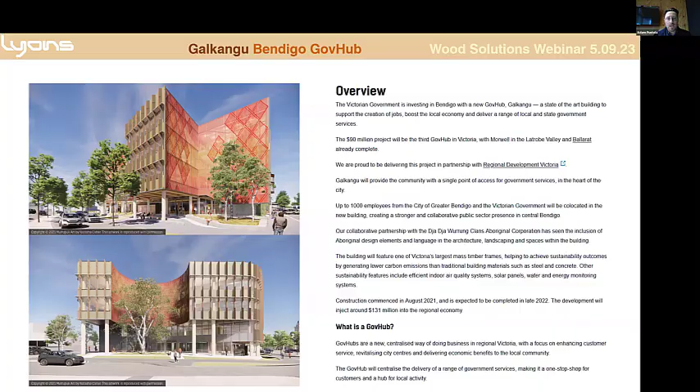The other really key part and driver of the project was our engagement at all stages with Dja Dja Wurrung, who are the traditional owners of the lands around Bendigo. Members of their community had a really important impact on all phases of the project, on the briefing, on the procurement of the project, as well as more directly contributing to the design of some elements such as artworks that are embedded in the project. They'll have an ongoing role in being part of this project.

The project is located in the very heart of Bendigo. For those who are familiar with Bendigo, or maybe not, Bendigo was a metropolis at the time of the gold rush in the 19th century.

It was built in the model of a very classical European city, and the site we're on is Lyttleton Terrace. It's a curved European-style boulevard, and our project actually occupies a whole city block, which was previously occupied by a number of different buildings from different eras. The project consolidated all of these separate titles and blocks into one unified GovHub site right here in the centre of town.

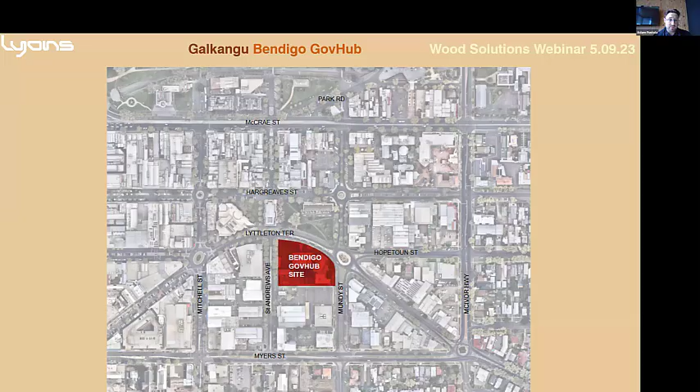So we had this really great location in the city within to make this important public project, but we wanted to make some very direct connections between our project and the city around us. These diagrams show some of the ways in which we did that.

First, we wanted to fill out the whole site, similar to how other parts of Bendigo are built right to the street edge, but that then set us the challenge of building to a curved street frontage, and you'll see how we dealt with that further on in the presentation.

We wanted to draw in some of the elements of the public spaces, such as the park and the forecourt, into our project to make a welcoming public plaza.

We also wanted to use this idea of moulding or pressing in some elements of the surrounding buildings, such as the library, the town hall, and the old Haymarket, pressing them into our building to make these small cutouts, to make it look as if this building's maybe been here longer than it actually is as a contemporary building.

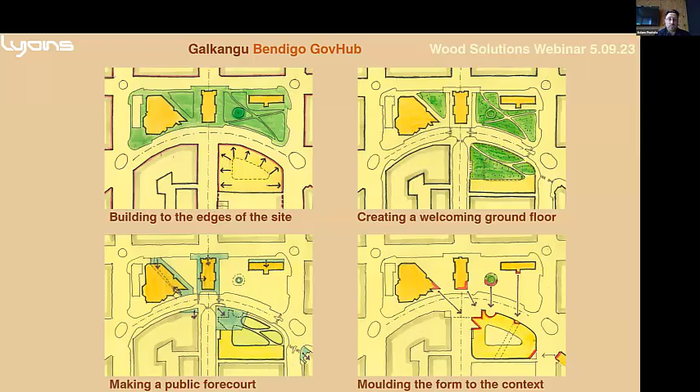And finally, as part of the overview, the building is a very large building for up to 1,000 staff.

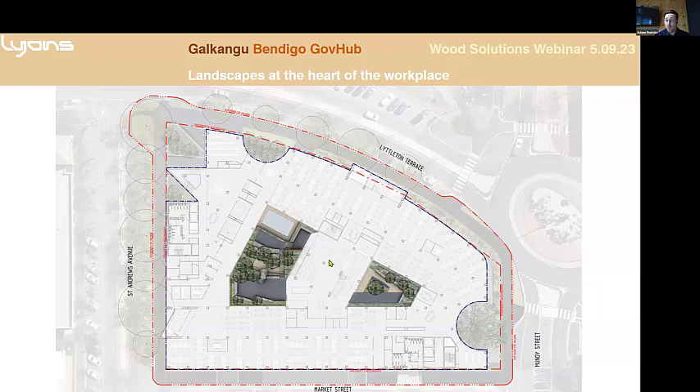It has 2 courtyards in the heart of it, shown here in this plan. In the middle, there is a central staff hub space that all staff have access to for social gatherings, lunches, teas and coffees. That's this space here. Adjacent to the staff hub are these two great landscape courtyards which terrace through the building and bring light and views deep into the heart of the project.

There are parts of the building which are more publicly accessible, such as this large meeting room and this stair, whereas the rest of this workplace is entirely for staff to move through, especially using the staff hub and the two courtyards.

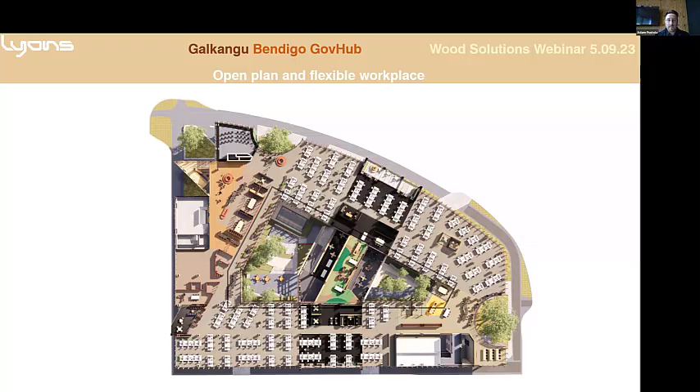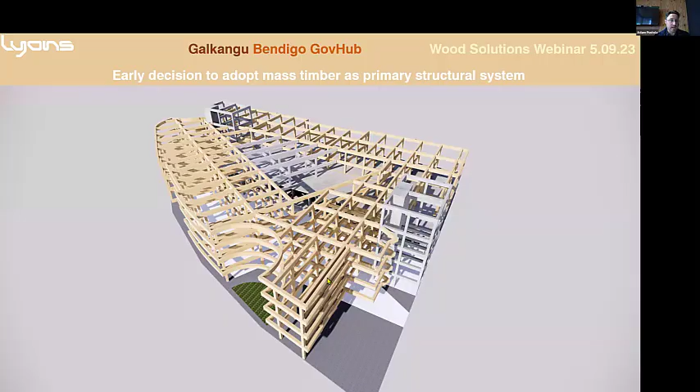One of the key decisions in the project, looking back, was the very early decision by Development Victoria to instruct us to adopt a timber structure, which set in train all of the design and engineering and collaboration, which led to the successful outcome.

It forced us to ensure that we were documenting everything in 3D. For those familiar with timber construction, what you see is what you get. You are going to be seeing every conduit, cable, light fixture, other fixings, and we had to make sure our documentation reflected as much of this as possible, so that we could be comfortable with the design outcome, as well as be able to present to our clients what the look and feel of the project will be like.

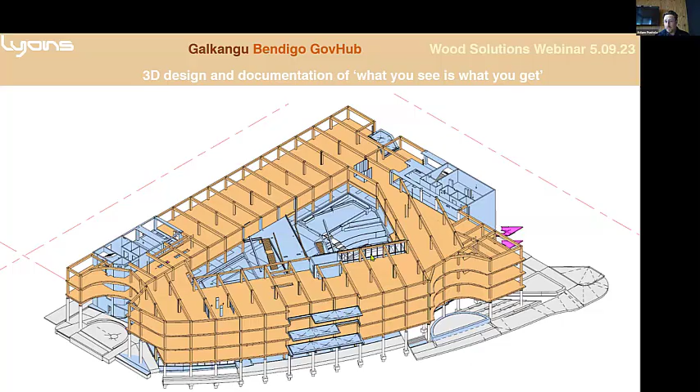These are some of our views from our documentation, which we undertook in Revit, which also shows that the project was actually a hybrid mass timber and concrete structure. There is a concrete structure on the ground floor. There are 3 concrete cores, as well as a car park.

It's 2 levels of an inclined car park that's on the back half of the site. So the project is about 2/3 mass timber in terms of its structure and 1/3 concrete, which is probably a trend which will continue into the future as mass timber comes into the industry.

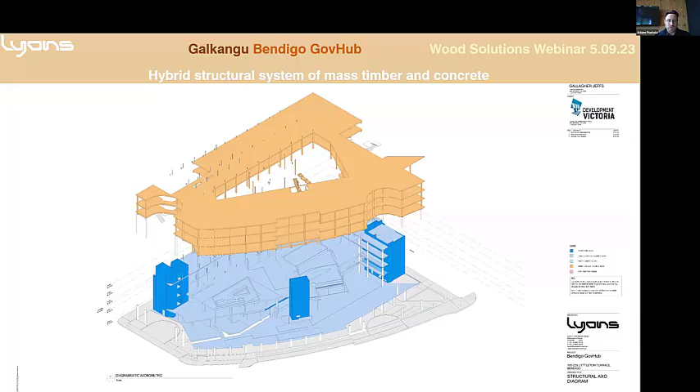Again, we also had to have very clear documentation of our ceiling plans, of our floor plans, even our below underfloor air distribution floor plans, to show the extent of all of the timber framing, all of the CLT, as well as, importantly for us, to document the visual requirements for the connections between the timber.

As you've seen from the plans and from the renders, we did create those complex cutouts to bring light and views into the project and to make those very direct connections between the town hall and the civic gardens. But what that meant is we were forcing the timber to adopt geometries that are not typical of the system, such as these curved and angled geometries.

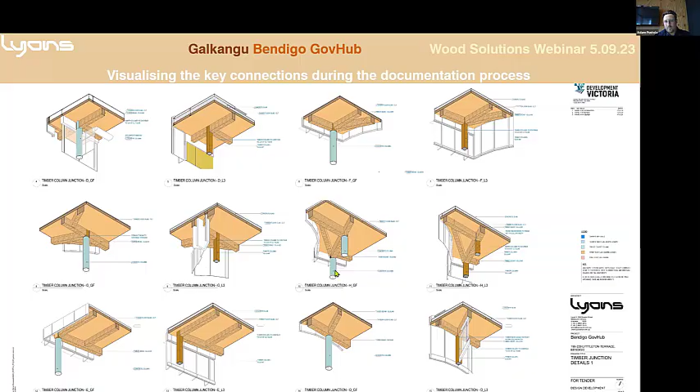So we created these drawings here, a few pages of them showing how we think these joints will come together. And then we worked very closely with ASH and with Fairbrother to develop these in much greater detail.

The other fantastic thing about using timber is the precision of it, which I'm sure Michael and Danny will speak to. But it is quite incredible how these materials come together with 1 or 2 or 3 millimeter tolerances, but that then creates its own challenges in terms of interfacing with concrete or steel, which, as we all know, has different tolerances and deflections as well.

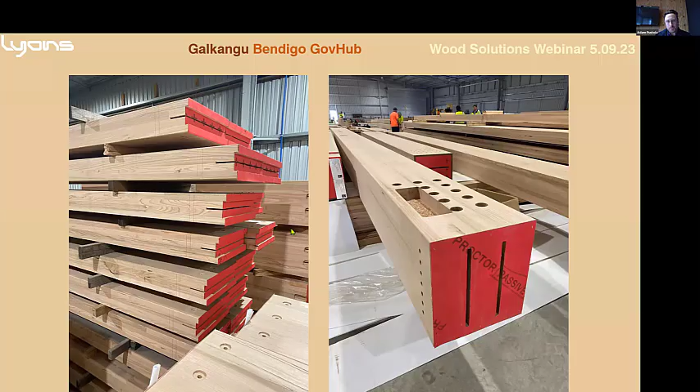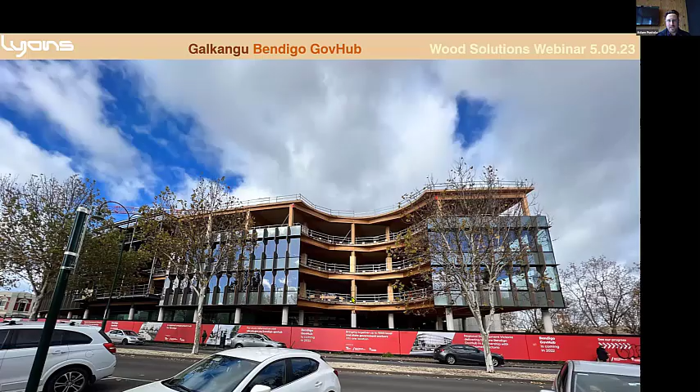These next couple of images show how some of that curved geometry was created in the project through faceting the beams here, faceting these mass timber beams, as well as faceting the edges of the CLT, and then the facade which clipped onto that provided the next layer of detail, also faceting to make those cutout shapes, but also afford these great views looking into and through the project and embracing this existing tree as well.

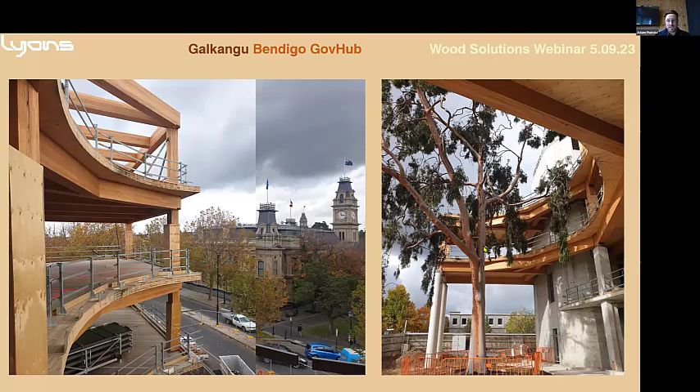In some areas of the project, the connections were quite challenging, and one of our key lessons learned is reflecting on the degree to which fire engineering needs to be used to work for all the different connection types. There's almost never enough engineering you can do on a project. There are obviously always limits, but we think it's a key consideration when you push the material in terms of geometry and where connections are exposed, that there was very close collaboration with the engineering and building teams.

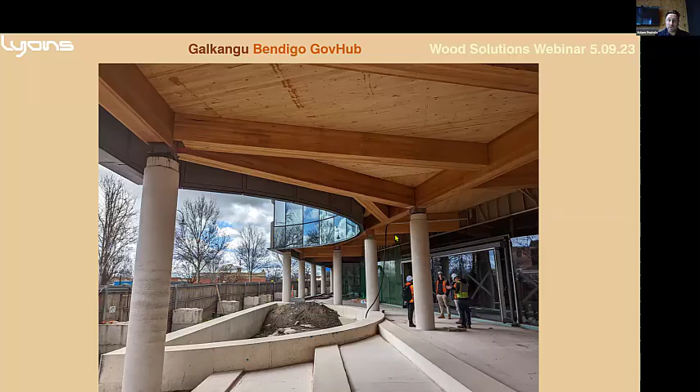And this is a view on the forecourt of the project. These next few images show more of the middle of the construction process. Here's our design team walking through the project, showing the timber just after it's been propped up. This is the CLT floor, which isn't exposed, but we do see the underside of it.

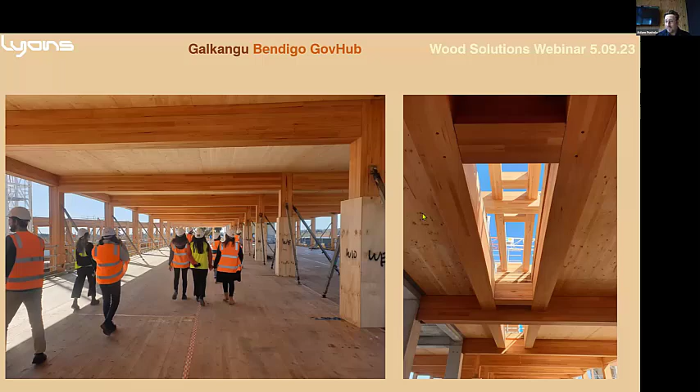One interesting observation a colleague made was looking at this element here. They asked if it was a void. It's actually a riser—we reckon it's the best framed, most beautiful mechanical duct riser going around. That was in part a consequence of wanting to use timber in a consistent fashion, minimizing where you introduce other materials like steel or concrete, minimizing different connections, and using timber as much as possible, even in moments such as this, to make these timber-framed riser ducts.

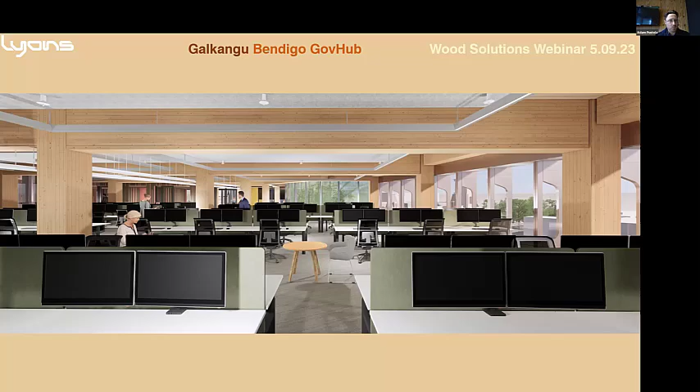The outcome of all this is a workplace that is very contemporary in its nature, biophilic in the sense that there's a lot of exposed timber with the beams and columns, and about 50% of the CLT ceilings. There's a lot of natural light coming in through the curtain walls on all four sides of the building. We were very confident going from the design views at 50% DD to what's being delivered by Fairbrother at the end of the project, which is really what we were expecting.

Another key negotiation early in the design phase was around different combinations of timber beam sizes, and whether we would use just primary beams or also secondary beams, and whether the services would be on the ceiling or in the floor. Obviously these negotiations are custom to every project's needs, but the key driver for us here was to maximize the exposure of the timber in the workplace levels.

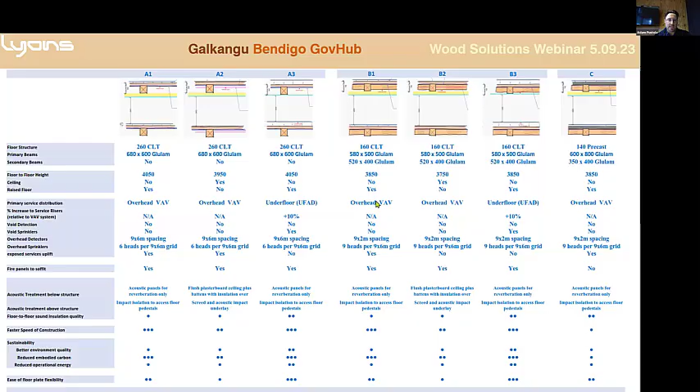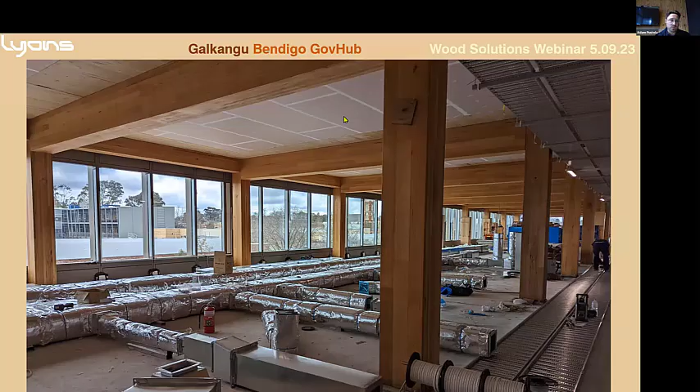Arup, who led all the engineering here, were really instrumental in working through these different options and getting us to a point where we could go from the standard model of services in the ceiling to services in the underfloor, where we had all the beams and columns visible and about 50% of the CLT visible on the ceiling, with the balance being fire-rated plasterboard as well as acoustic panels for those workplace areas.

And this was that sort of last option. The other restriction we set ourselves to make construction hopefully a little easier was not to have any penetrations in the beams. So we wanted to keep all the sprinklers and lights within these zones here or in the underfloor, and not have any penetrations through the beams, which would have created other complications for coordination with services.

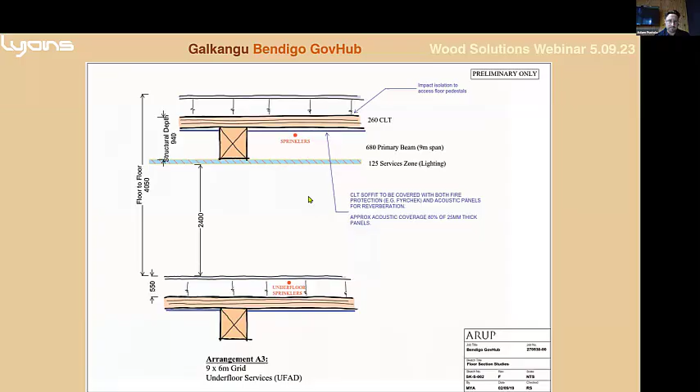Again, a view of the workplace as designed and then as delivered in the real project, which is looking great. And this is a view looking out to one of the courtyards.

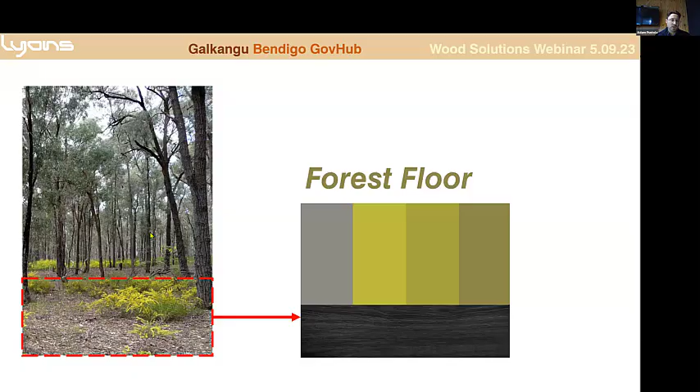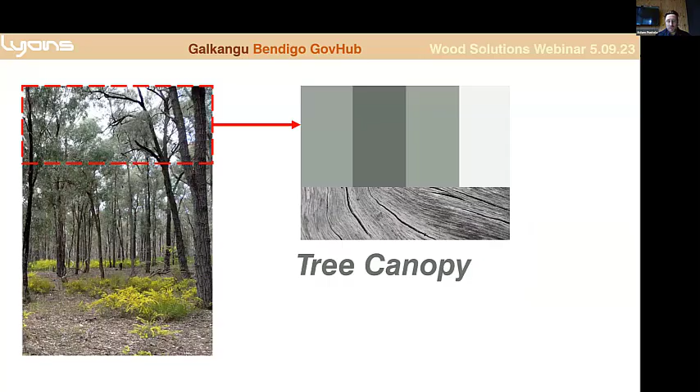With the timber, it was also a key part of the interior materials palette. It creates a fantastic neutral and warm backdrop, but we also wanted to create a narrative connected to the forests around Bendigo. So each level is color-coded with a different idea, either about the forest floor, the iron bark of the trees, or the tree canopy. We use the structural mass timber as a background, and on top of that different color carpets and furnishings to identify each level and create a very local narrative throughout the project.

And here you can see another level up on level 3 using this ironbark-themed color scheme.

There are areas where we would have loved to have done a little bit more timber, such as the main public stair on the corner of the building, but it is all clad in timber. It does look great. Maybe on the next project we can push for timber stairs, but we also wanted to ensure that all parts of the project that weren't concrete maintained the same look and feel.

Be a really warm timbered space for both the public and for the staff to use. So finally, as my quick reflection on the project and some lessons learned, using mass timber construction is a really important step change in the construction industry.

Changing and going to more sustainable forms of construction, and I don't think we should take that for granted, but also how exciting that is to be part of. Using mass timber for us also connected into other bigger design narratives around engaging with local Indigenous culture, the well-being of the workplace, and talking about innovation. So it's not just mass timber by itself, it's part of a larger narrative about creating a contemporary as well as locally connected project.

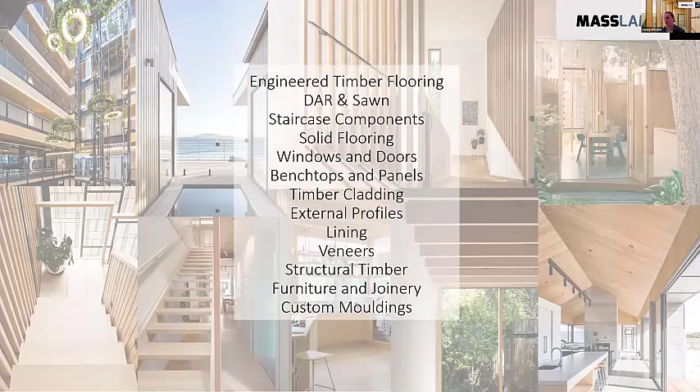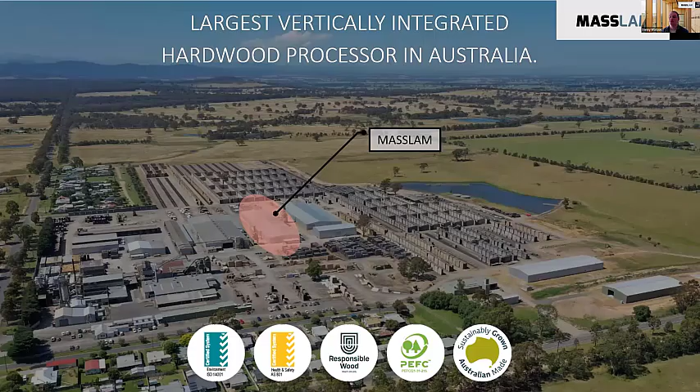The Masslam line highlighted here is where all of our mass timber is finger jointed, pressed, planed, CNC'd, finished, pre-attached, wrapped and packed ready for delivery. At the center of this line is our Hundegger K2I CNC machine. We've also got a secondary CNC machine available for smaller sections and a third one to be commissioned in March.

The Masslam line is unique in its ability to take individual sticks of timber and finger joint, press, plane and CNC in one complete line. So you've got individual sticks coming in, similar to your framing timber, coming through the finger joining press line and then into the CNC without anyone touching it in between. This is the machine that produced the 748 individual GLT components for the project.

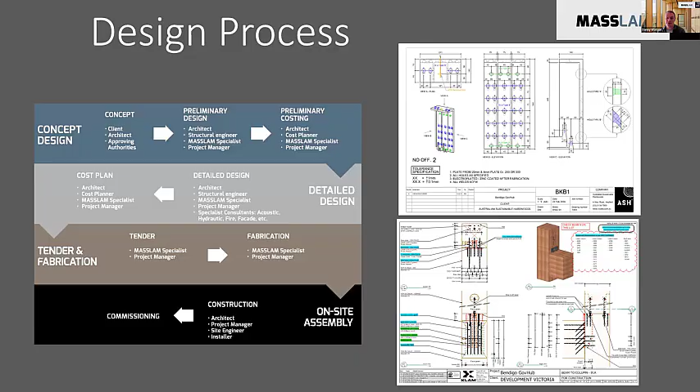Going through the design process, this is one of ASH's first mass timber projects and largest to date. The design process was completed by Xlam, with ASH assisting with the design for the GLT components. Xlam and ASH worked collaboratively under an early supplier agreement to assist the consultants with timber connections that achieved the 90-minute FRL through a sacrificial char layer. Early involvement identified potential risks in the design by evaluating each node point on structural performance, aesthetics, and speed of install. That's the node points you would have seen previously in Adam's presentation.

The first project-specific challenge was with the geometric complexity of the facade. As Adam pointed out, a fantastic look for it, but as you can probably see here, all of these different connections are unique. Each of those requires a different connection, different CNC, different fasteners, and then a look at how that all works in a fire rating system.

Being a manufacturing line, modular construction is key for us, as it's easier to replicate the same component rather than produce unique parts. Basically the same concept as why an IKEA chair will be significantly cheaper than custom built furniture. For us, this presented challenges with subtle differences between the thousands of steel and GLT pieces, which required in-depth QC offsite at Heyfield and also at Xlam's Wodonga site and on-site in Bendigo.

To counteract this, we looked to standardize aspects of the angled facade line. We developed a series of plywood templates and tools to quickly check and pre-attach standard plates to unique connections, removing that complexity from the on-site work. The result here is connections that are all hidden. This works on the aesthetic part of it, but also from a fire perspective, hiding all of those steel components beneath a sacrificial char layer.

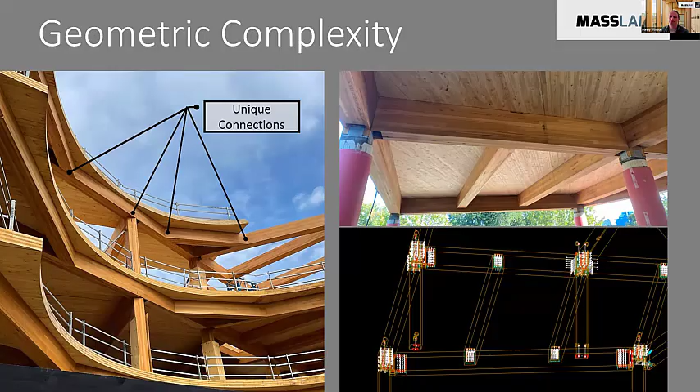The second challenge was common to most projects at the time in the pandemic - steel costs increased 40%. An accelerated design program with early contractor involvement allowed us to procure components early with a fabricator in Heyfield.

Fire testing was required to be organized remotely, and all components coordinated for assembly at ASH before delivery to Bendigo. Fortunately, due to both Xlam and ASH's manufacturing in regional areas only a few hours from site, the project delivery was not held up by international shipping concerns, allowing the design to continue in parallel without a lag from approved shop drawings to a finished pre-attached component arriving on site.

At an early stage, fasteners procured from overseas were identified as a potential risk, but with early involvement, prototyping, and 3D modeling, these could be ordered with certainty to avoid getting lost on any Panama-bound boats.

In regards to prototyping, this was one of our first projects of this magnitude, and we really wanted to test out our processes at scale to see if they were efficient. To ensure each connection could be CNC'd and installed, ASH created a prototype of the typical connections to evaluate the smaller details of each type. This allowed small adjustments to be made in terms of tolerances and install before running on site where the stakes are much higher.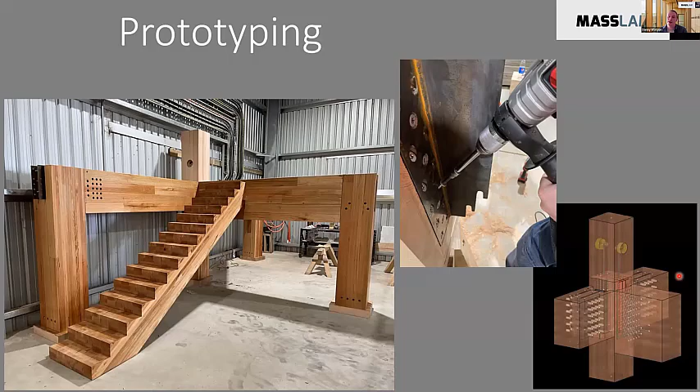These seem like minor things, but brought up over the many different connection node points, there's 10 to 15 minutes to be saved on each part, which adds up to a lot over the whole project when you've got 750 parts. This allowed us to make considerable savings in manufacture time, but also allowed the program to be accelerated with a second tower crane.

To do all this, we use a combination of CNC and CAM. With hundreds of tools available, the variables quickly climb for projects of this complexity, with many components containing 300 plus individual operations, each to a plus or minus mil tolerance. This becomes of particular importance when interfacing with other materials such as steel and concrete, which have much larger tolerances on site. The timber side still needs to be accurate to work with the dowels and screws, but on the steel and concrete side, it needs to have the flexibility to work on site.

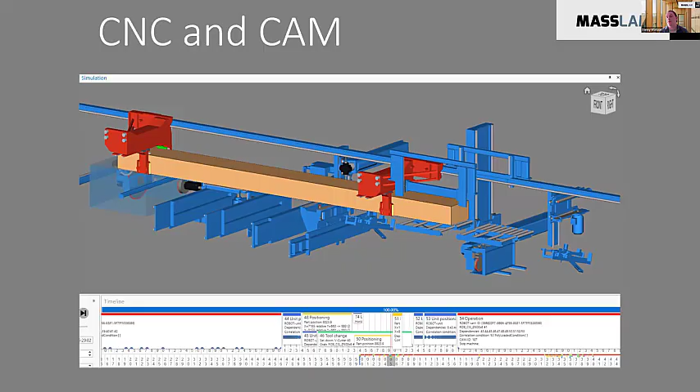So the CAM allowed us to simulate the connections on the machine to see what was possible and where it could be improved.

To remove further risk from the manufacturing program, ASH and Xlam pushed for a geometry freeze, effectively locking in all the CLT and GLT components, allowing press manufacture to continue in parallel with detailed design for CNC and connections. This was helped by Lyons working in 3D, as well as the two fabricators, ASH and Xlam, coordinating and reviewing these in-depth connections.

To give you an idea of scale, on the left-hand side here you've got approximately 10% of the total volume that was pressed. Each of these stacks is 4 meters high. All components, either pressed or fully packed and wrapped ready for site delivery, like on the right, could be stored under cover at ASH's Heyfield facility.

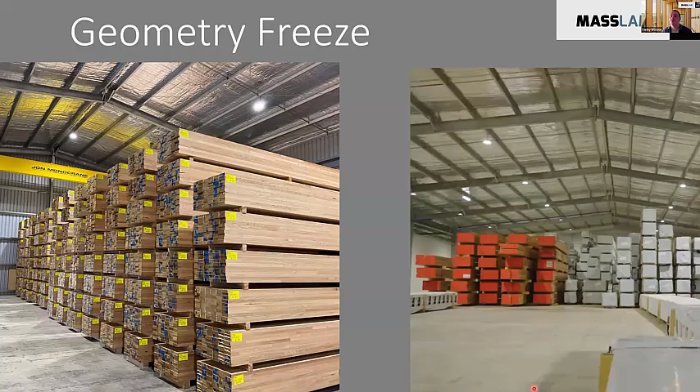Complexity of connections was identified early as a potential pinch point to speed of install, with lift time the key criteria. Taking these connections off-site as much as possible allowed components to be ready to lift on site, and repetitive tasks such as the 40+ dowel pins or screws per connection could be done in a controlled factory environment. This stopped delay between lifts and also produced higher quality since these could be controlled in the factory.

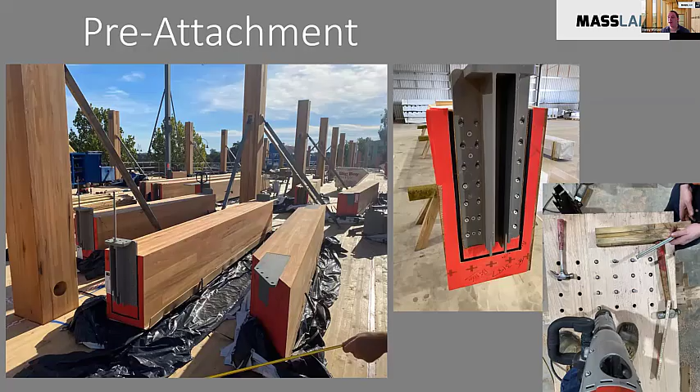This pre-attachment required increased forward planning in terms of component delivery and sequence. One of the advantages of local supply components was they could be manufactured just in time and held in undercover storage with flexibility in truck loading, allowing for unforeseen delays on site due to weather and other trades.

Unloading trucks without demurrage delays did prove difficult, and we have since utilized pre-slinging and column stillages to reduce the unloading time, and also the number of lifts required to take components off the truck and into the required areas.

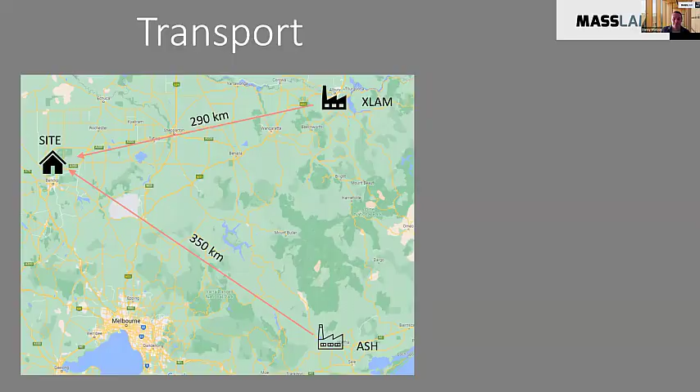Looking back at some of the lessons learned from our first major project, in terms of design, we've since tripled the Masslam design team to be able to take on all mass timber projects in-house at ASH, which allows us to get the most manufacturing efficiencies, speed of install, and allows for modular design.

In terms of detailing, we've learned that simple detailing is often better, with some lessons learned on the behavior of our timber, and to utilize material properties like our increased perpendicular-to-grain bearing, and to center around simple bearing-type connections, or even continuous beams, to take out some of the complexity.

Around milestones, we've looked to engage and educate early with consultants about the mass timber design process to understand how approval timelines work and how they interact with production. And then finally, transport - as I've mentioned, providing easy-to-install options straight off the truck to reduce crane time.

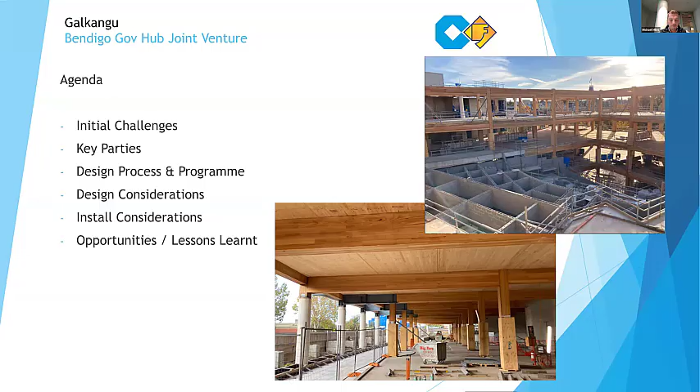I'll wrap it up with our opportunities and lessons learned that we developed through the journey with the team, and I'll have a short 1 to 1.5 minute video time lapse of the structure going up. So that's what I'll be discussing.

This project kicked off at the end of 2020, and we know how turbulent 2020 was with the pandemic. So it was a nice, meaty, complicated project from a timber perspective, but also had a lot of intricacies that Adam touched upon with design intent.

It was obviously one of the biggest mass timber projects in the Southern Hemisphere - well, it was the biggest at the time, with those sort of CLT and GLT numbers that you see on the screen.

It was predominantly a concrete slab on ground, concrete cores, and concrete car park, but the rest, front of house, roof, was all timber with some lightweight steel for balconies, the feature stair, and roof plant on top. So there was a lot of interfaces with timber, concrete, and steel, and then you throw in the facade and the finishes internally. It was a pretty complicated project, and when we picked it up at 50%, there was obviously a lot to unpack.

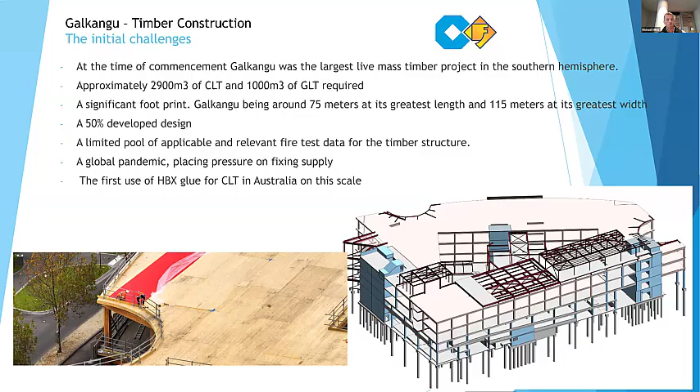Then throw into the mix the challenges with procurement, so fixing supplies, as Danny alluded to. We overcame a few challenges there by going local, which I'll touch upon later. There were also a few Australian firsts with the use of HBX glue that was fire engineered into the job, and we made sure we abided by that to have a conforming design. So those were some of the initial challenges we had to unpack when we picked up the job.

The key parties that were novated to us at 50% when we won the job included Lyons, represented by Adam, ASH with Danny, and Arup for fire engineering and structural engineering, which was great because collaboratively, those parties along with Xlam, we were a pretty tight group that iterated each connection detail, and all those parties had to tick their box from their respective disciplines. So it was an iterative process with those parties working pretty tight knit.

Xlam, as Danny said, were engaged for shop drawing of both the CLT and GLT, but Danny's process and smarts on manufacturing really informed the GLT process and how we made it the most efficient with minimal wastage of GLT. So we really leaned on Xlam and ASH for their smarts, working collaboratively, and we've taken that partnership onto our current jobs working on timber, and I know they're working on future jobs elsewhere as a collaborative unit. That's great to see those smarts being combined.

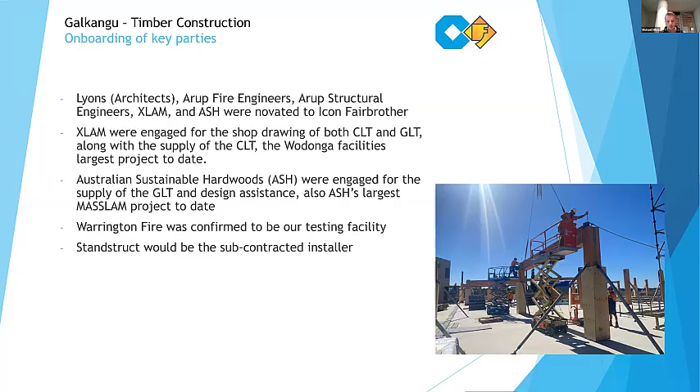And I can't forget Standstruct were also our timber installer on site. We brought them in nice and early as well, because there's a bit of smarts around the logistics, transport, and the sequence of install. Look, all parties you see on the page were intimately involved, very involved with the architectural intent, the structural robustness, fire performance, safety being paramount for install, and transport and logistics.

Just at a high level, the design sequence for the timber structure only really involved locking in - I like to say locking in the architects, but we can never really lock in the architects - but we did work with Adam and the team to get some certainty around the structural profile of GovHub, which then allowed us to activate the timber outlines, as Danny alluded to, particularly for the columns and the beams.

We had a bit of flexibility with the CLT floor plates because that would come later, but definitely we worked in with locking those timber outlines for GLT. Once we locked in those timber outlines, we then started getting into tranche one of connection details for GLT.

All those connection details we call typical are those we call the 80-20 rule, where 80% of the typical connections had fire testing associated with them, and we could use them confidently. The non-typical tranche two were the ones that we had to do further work on.

They were really the complex geometries, multiple beams hanging off a column, a bit of steel exposed. So we spent a lot of time in tranche two detailing and working through with the stakeholders how we promote, challenge and agree on those non-typical connections. That 80-20 rule activated a lot of early procurement of the typical connections, while it allowed us to go into detailing the non-typical.

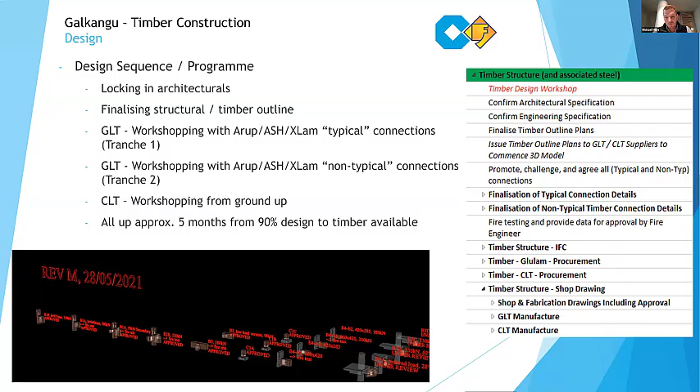I'm not going to go into too much detail, just conscious of time, but there was a significant amount of fire engineering involved, and we picked up the fire engineering brief and took it to a fire engineering report. But obviously we had a lot of fire testing that needed to be accommodated, as requested by the fire engineer.

One of the biggest performance solutions we had was the 120 FRL down to 90, which assisted with, as Danny alluded to, the charring layer on the GLT, and that really helped us with getting the fire engineering sorted out and the fire testing approved prior to inclusion with the FER.

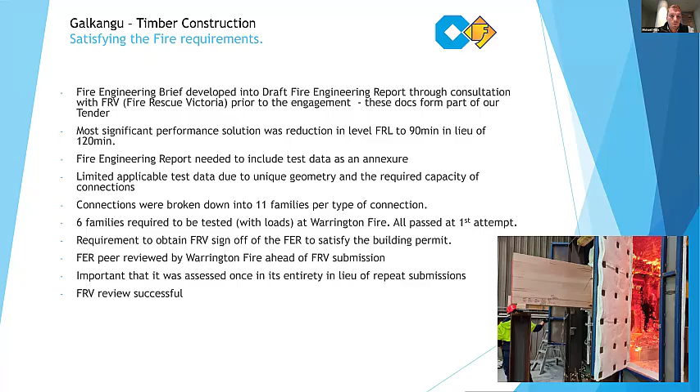The FER went to Warrington for a peer review, and then it got submitted to the FRV, where all in all we tested about 6 connections. They all passed on the first attempt, which was great at Warrington. We submitted our FER to FRV, and that was, in close dialogue, approved successfully. So that was a great outcome for fire testing.

Just some quick fixing selections and procurement comments. Obviously Danny alluded to, we got impacted by some supply chain issues. So we reached out to local suppliers for the GLT fixings, which were done in-house at ASH's factory, but also the CLT to CLT fixing that you can see on the screen in plan.

We made them locally, and we got a mixture of various fixings or fasteners from Spax, Rothoblaas and locals to really make sure that we had certainty in availability, because we didn't want any of our structure being held up by steel plates or fasteners not being available.

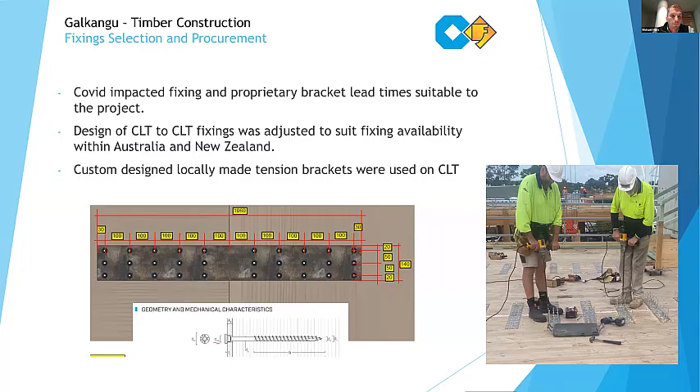That allowed us to basically get the beams hanging off the columns prior to them being fixed into place. It basically allowed us to drop a beam into that little notch you can see there, and position the column, position the beam, in place where it will be fixed eventually. So it minimized hook time, tower crane or mobile crane time. That little seating hook introduced basically avoided, from a safety perspective, the need for Standstruct to get in and potentially have their hands caught while the GLT's on the hook.

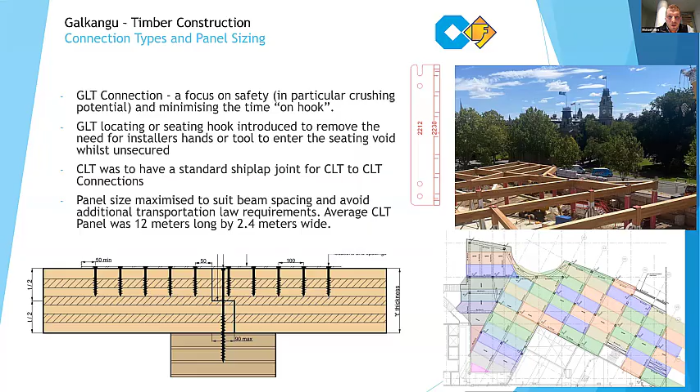So there were just these nifty little details we picked up along the way that meant more safe and quicker installation from a tower crane and hook time perspective. For the CLT to CLT joints, we sought information from Standstruct on that shiplap detail you can see on the screen in section. We also maximised our CLT, which you can see in plan as the colourful rectangles, to the maximum size that spans beam to beam, while also taking into account transportation limitations. So a lot of smaller things that meant really efficient installation down the track.

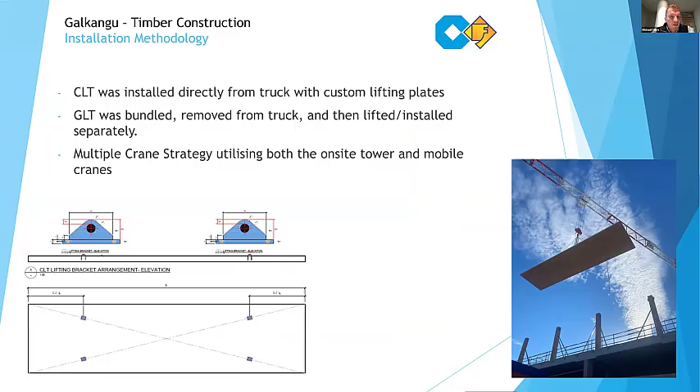There were a few little wins we implemented in our CLT and GLT transportation, which meant when we got to site everything was fitted off and prefabbed. You lift it off the truck into the final location, and we utilised multiple cranes given the expansive floor plate of the site.

In summary, there was quite a bit of timber structure and associated fixings and stitch plates. That's just a little summation of what we had on site.

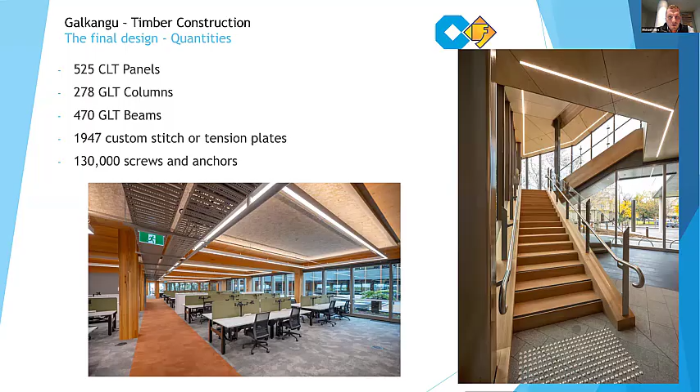Some rates that we achieved: we got the structure completed in 87 working days, which was a massive effort. We lost about 16 days to inclement weather, but we averaged about 18 members on site, with the best being 37 in a day. It was a huge effort in front end planning and from the team out on site.

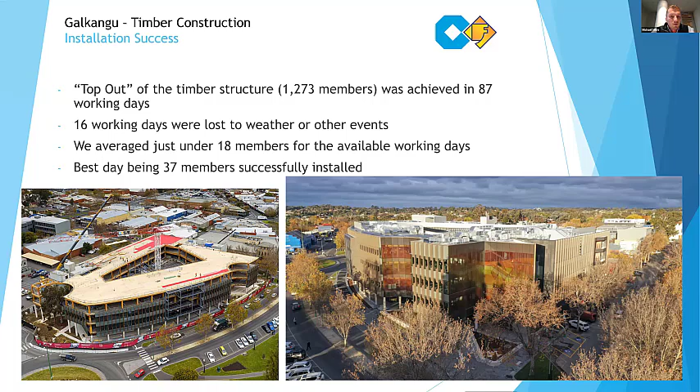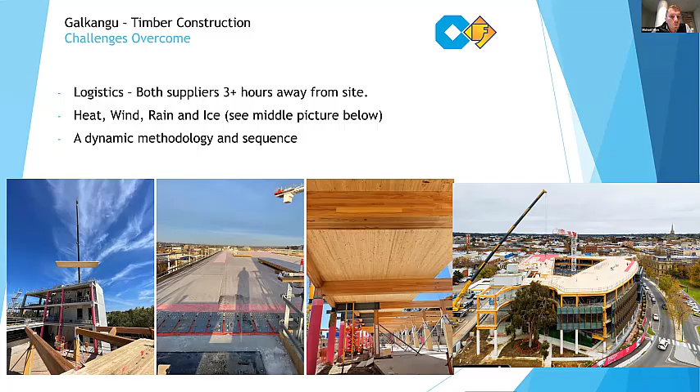As Danny showed you geographically, we had supplies from New South Wales and Victoria, and we made it all work, installing most of the structure in pretty extreme weather. Bendigo is fairly hot in summer and very cold in winter, but we made it work with the conditions presented to us.

Opportunities going forward: as Adam alluded to, timber's going places that we're very excited about here in Australia, and Icon Fairbrother is chomping at the bit to get more mass timber projects across the line and work with architects and engineers alike. We see it as something the industry is moving forward with. Mass timber is going to be the concrete and steel brother and sister to those elements.

Another big winner, which Danny alluded to, was fitting in the factory. We highly back that call, and we wouldn't do it any other way. We don't want to fit on site, there's enough complexity on site when things arrive, so we want to make sure it's all done at the front end. Danny and Xlam and the team have got the smarts in the model, and front end can plan everything down to the tolerances specified.

With Adam and Lyons and the structural engineers inputting into the model, we all have a live version of the model. As stated, we build it once, we design it once, and we build it once with timber. There's no real having to post-fix something or change something out on site, which was fantastic.

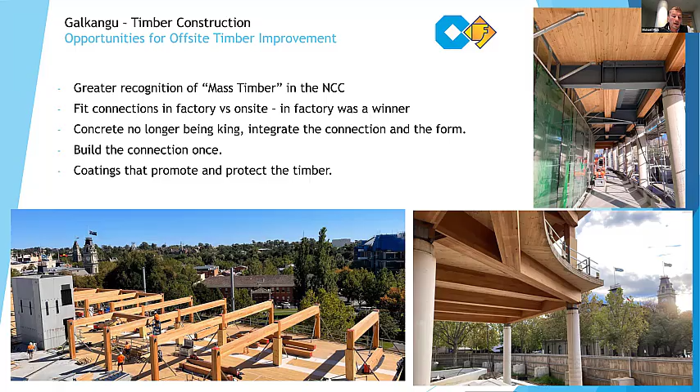The last one, I think, is coatings. From a builder's perspective, we obviously have coatings for architectural finish, but we'd like to see coatings in future from the suppliers for waterproofing and fire protecting. If we can go down that avenue of pre-factory coatings with waterproofing and fire protection provisions in them, I think that would be a huge outcome.

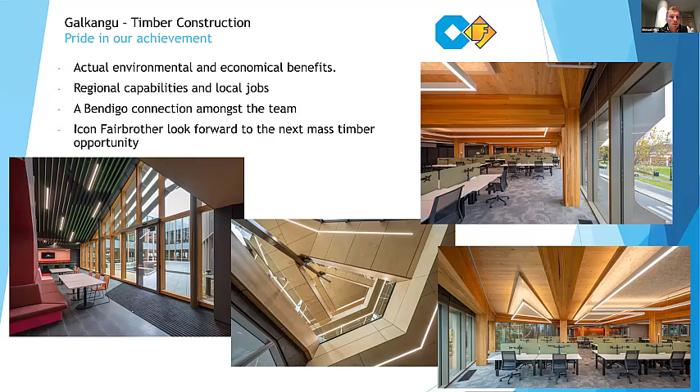There were so many benefits for Bendigo. As Adam said, we're basically in the heart of the town, getting all the government and municipalities into one location in the heart of Bendigo. We used ASH and Xlam from an Australian supply point of view, and got local fabricators of stitch plates and fasteners involved. It was a great outcome for the Icon Fairbrother team.

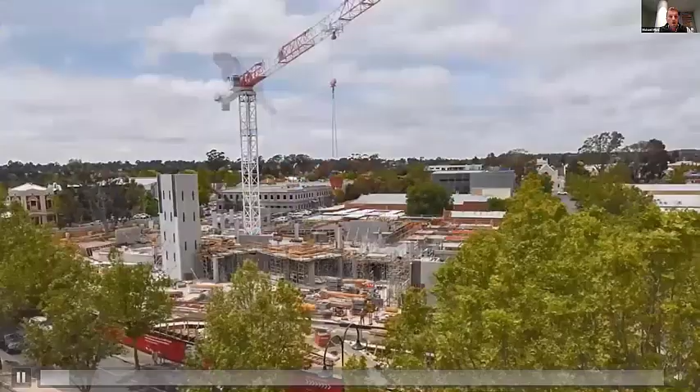I'm just going to summarize it with a bit of a video, a time lapse of the structure going up. You can see the concrete's done, that's the back of house, and the cores have stood up, and there's the car park there. Then you can see pretty quickly timber will activate from ground floor.

There's no basement here, so you can see the concrete columns going up at the foreground, and straight away the GLT beams go on. CLT level 1 goes up, then GLT level 2 goes up. I can't keep up, it's going so quick, but that's basically the sequence.

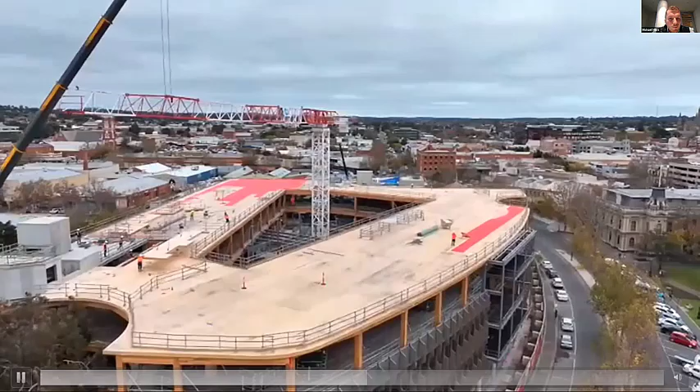We had two teams of CLT working. You can't really see it, but essentially that was the fly through. There you can see the roof of the structure again in CLT. That red is a Proctor wrap left there in the permanent scenario, providing a bit of waterproofing and vapor permeability before the metal deck roof went on top.

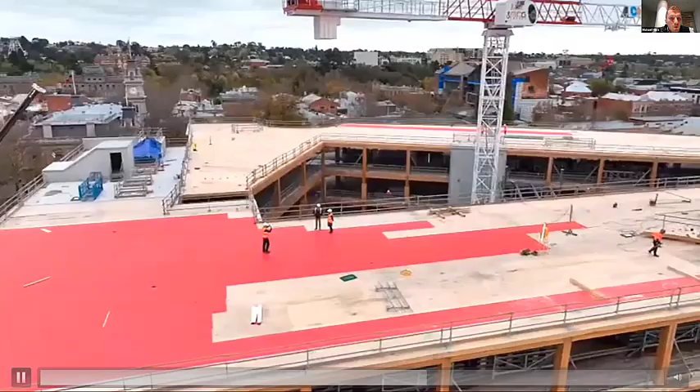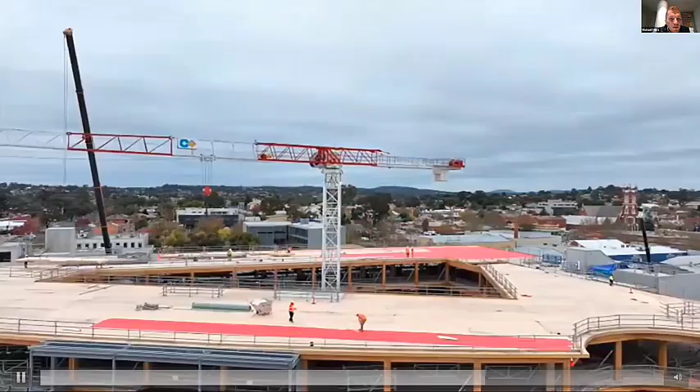There's a bit of a drone fly through, I think that's east-west. You can see our tower crane in the middle, where we've got the little courtyard, the concrete courtyard in the center there, and there's the core and the timber structure.